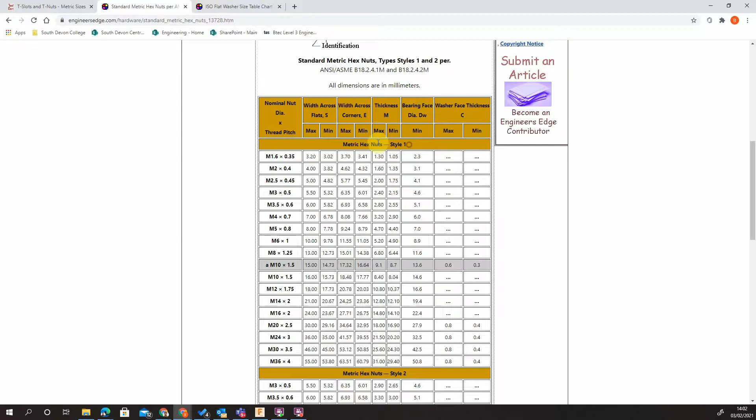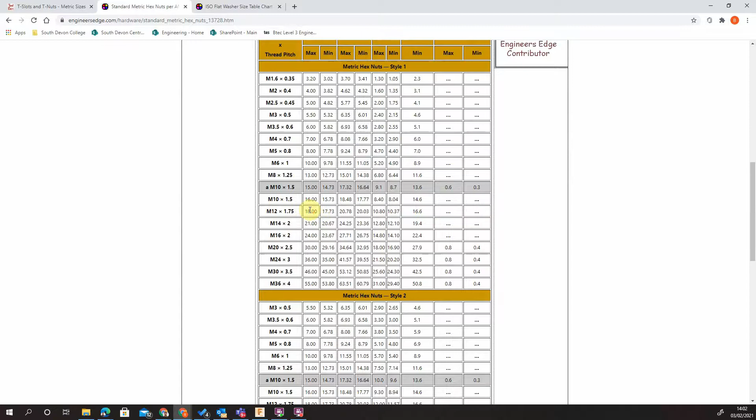Looking at a standard hex nut on a metric scale, we're going to look at style 1 - there's two styles, it just depends on the thickness. Style 2 is slightly thicker than style 1. For M12 times 1.75, we have across the flats a thickness of maximum 18, minimum 17.73. Across the corners slightly bigger, 20.78, and a thickness of 10.8. So we're going to go 18 by 10.8.

So what we're going to do is come into create, come down to polygon. You've got circumscribe, which creates a polygon using center to one point of the edge, or you've got inscribe, which creates the polygon inside. So we use circumscribe.

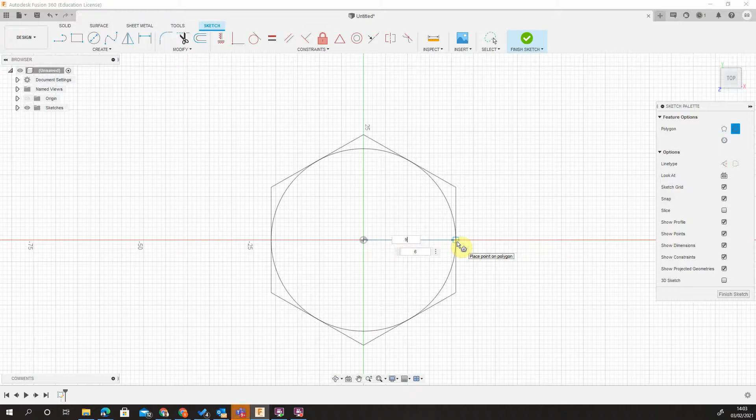We're going to put our dimension in - it's 18, so we need 9 as a radius. Let's just measure across the flats - we obviously know it's 18. Come into the solid, and we want 10.8 profile thickness. Like so - there's our nut.

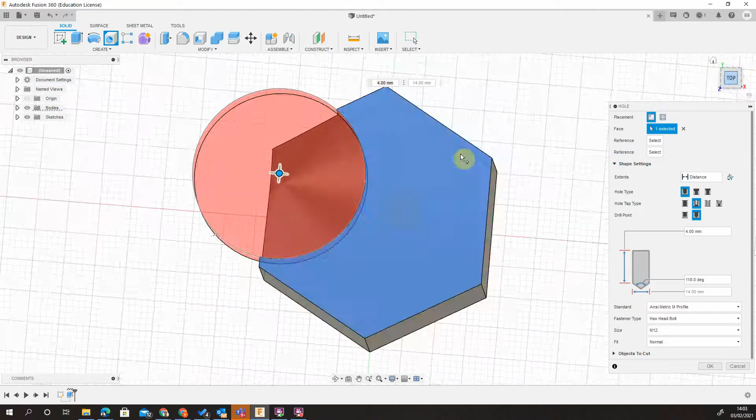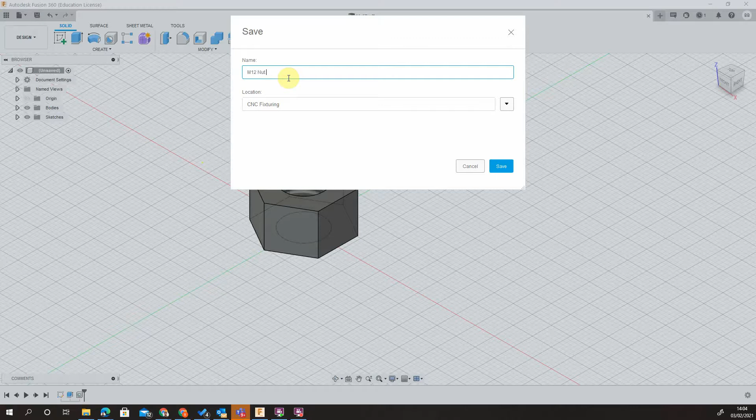So I can save this in my fixtures: get M12 nuts style 1, 10.8.

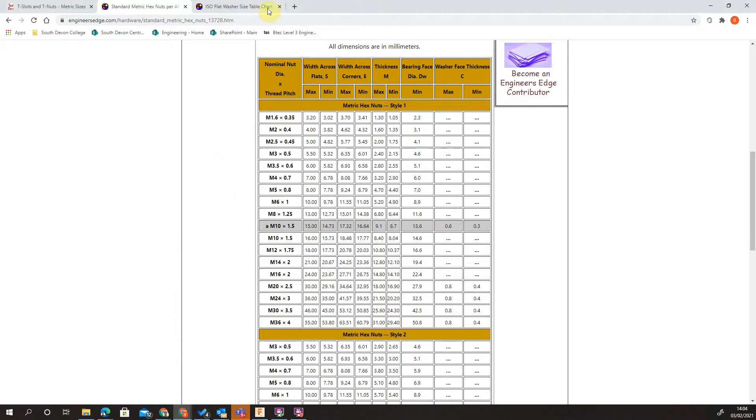Now the washer - I'm going to use a simple flat washer, or penny washer as they're sometimes called. The through hole here will be a clearance, so it'll be about 13mm. Outside diameter would be something like 20 to 25mm, and thickness is anywhere between 2 and 4, depending on what style of washer you've got.

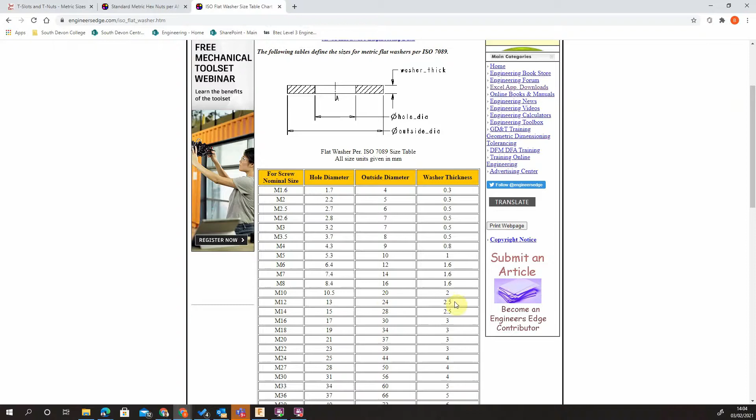So just running off Engineers Edge database: 13mm clearance, 24 outside diameter, 2.5mm thick. So again, same as last time, on the top profile we're doing 24mm diameter.

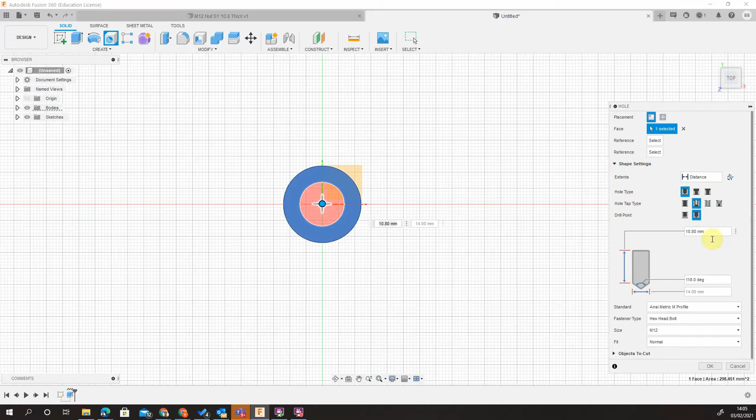Extrude 2.5mm thick, and we're going to put a hole in, which can be our clearance. So use the clearance function on the center, so we have a clearance. That one there - clearance, distance, through all. Hex bolt M12, which is okay, and there's our penny washer as well.

So we can now save this one - M12 washer, 2.5 thick. So that's just how to quickly do a nut and a washer using standard ISO profiling.